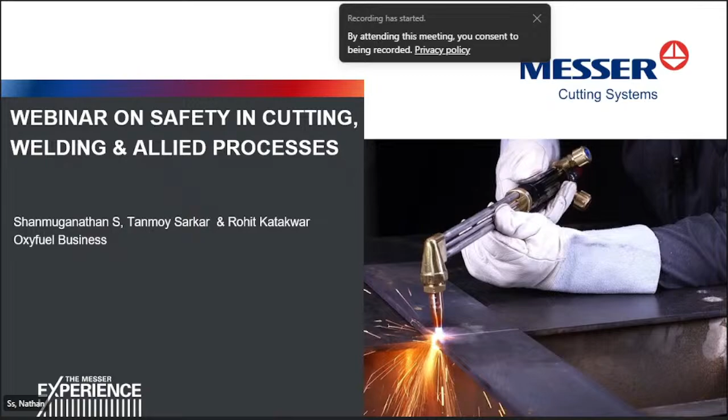So we move on to our topic. Just before that, a small introduction on our Messer Cutting Systems. Messer basically is a company more than 125 years old. It was founded in the year 1898 as Adolf Messer GmbH in Hoechst at Frankfurt in Germany. This company's business was initially acetylene-based lamps, that is lighting systems for automobiles. So what you see here is one of the first products of the company, which is an acetylene-based lamp.

So those days, automobiles did not have this kind of headlights. They used to have this kind of lamps as headlights. And later on, they made acetylene generators, gases, and so on. Slowly in 1903, the R&D team of Messer introduced the first oxyfuel cutting torch in the market. Ernst Wiss was the scientist who brought in the first oxyfuel cutting torch. It was later patented, and the present day cutting torch is a development from this basic model.

In 1965, Messer Griesheim was formed with Hoechst Pharma as the biggest shareholder. And in 1970, the first CNC cutting machine, the first laser cutting machine, was launched into the market by Messer. So there are many such firsts, as Messer is a pioneer in welding and cutting business, and they are also the largest gas manufacturing business company in the world. As far as family businesses go, Messer is the biggest gas company in the world.

We are part of the Messer group, and Messer Cutting Systems has got 5 plants worldwide. The mother plant is at Groß-Umstadt in Germany, around 85 kilometers from Frankfurt. Then we have a plant at Menomonee Falls near Chicago in USA. Then we have a plant in Sao Paulo, Brazil. We have a plant in Jiangsu province near Shanghai. And we have our Indian plant at Malumichampatti, on the outskirts of Coimbatore. So our plant is the youngest of the lot.

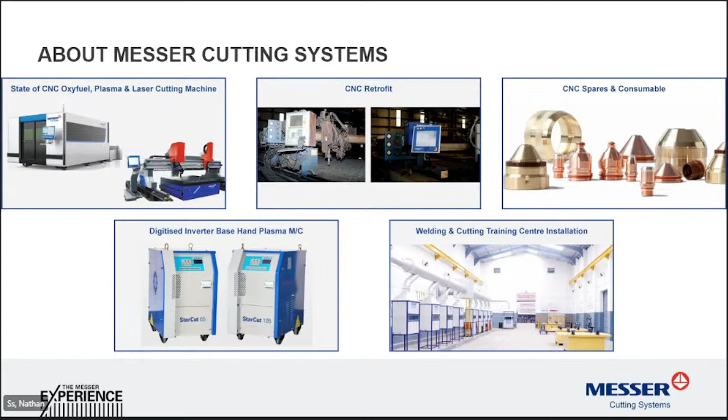We also are into the business of genuine CNC spares and consumables, to ensure the machines give good performance. We also have a range of digitized inverter-based hand plasma machines which give very good performance. And we help in setting up welding and cutting training centers across the country, along with industry and academia. We have a complete range of gas equipment, which we'll see in more detail today, a full range of engineered gas supply manifold systems for technical gases, and a complete range of welding accessories. We also conduct safety training programs and gas equipment safety assessments for companies.

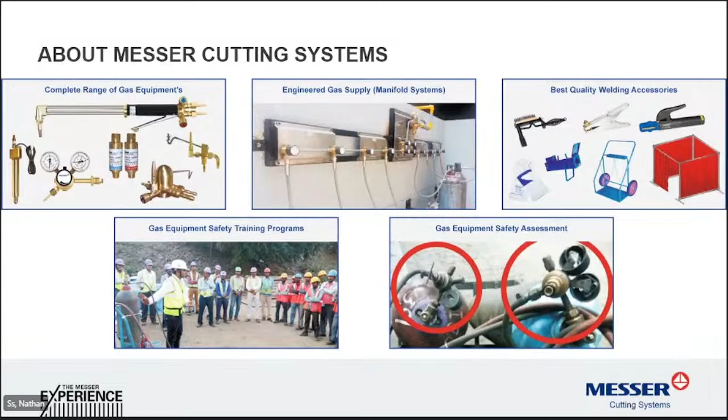So these are some of the offerings that we offer to customers. Our safety training programs are appreciated across the country, and we do close to 500 plus programs every year at various sites and factory locations. At Messer, we always try to give a positive experience to our customers consistently.

Whether it is a phone call, an email, or a visit to our factory, or a visit of our personnel to your factory, we always try to have a positive and consistent experience for the customer.

This is a glimpse of our manufacturing facility in India. We started this factory way back in 2009 at a rented facility with only a few employees. Then we moved to our own facility in 2013, and today, after expansion in 2019, the present facility looks like this.

Here we manufacture oxy-fuel, plasma, and laser cutting machines, plus gas cutting torches, regulators, and a few other products.

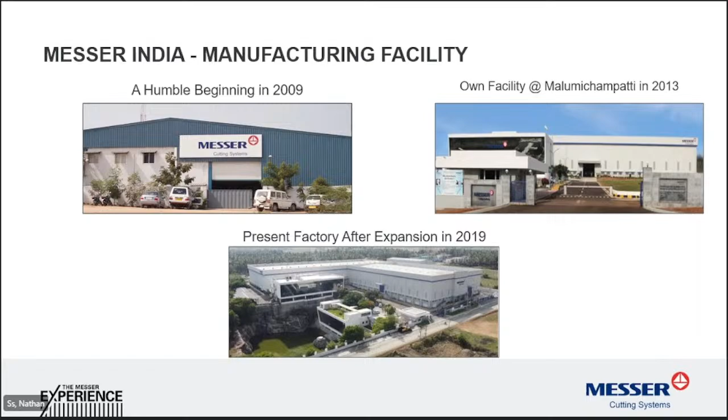This is our 300 plus strong team with a very vibrant R&D and a full-fledged sales, marketing, and service team. These are your oxy-fuel contact people across the country.

So now we move on to our topic of the day. These are a glimpse of the products that we offer to our customers.

These are oxy-fuel equipment, manifold systems, and welding accessories. You can see there is a complete range of equipment.

Just look at the regulators themselves - there is a variety of regulators available for various gases, various pressures, and various applications. Likewise, we have cylinder pressure regulators and manifold regulators, which differ in functionality and ratings.

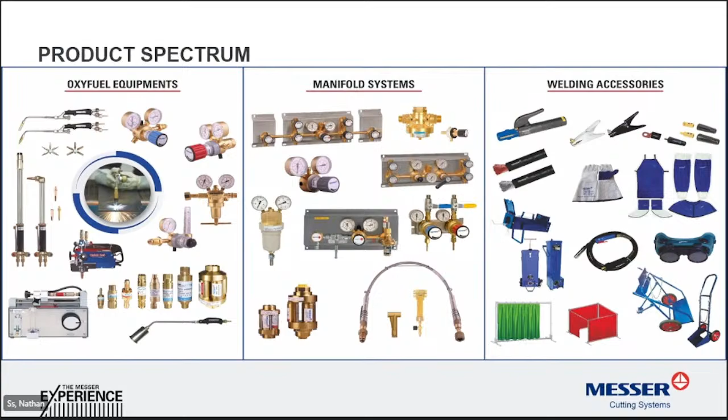Likewise, we have a complete range of welding accessories which ensure the welder's safety.

This is a glimpse of our manufacturing facility in Coimbatore. You can see our regulator assembly and testing line, and also the torch testing line.

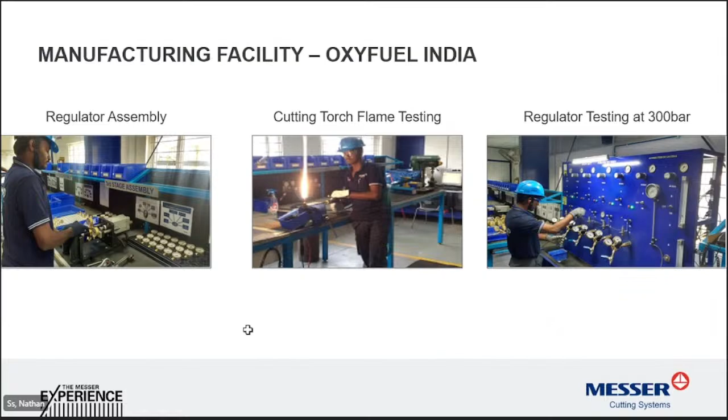For your information, all products manufactured by Messer at our factories are 100% tested before dispatch. There is nothing called batch testing - every product we make is tested 100% before we send it to our customers, so you can be rest assured about the performance and quality of the products.

Now, this is something for you to think about. Gas cutting has traditionally been regarded as a low-end technology process that anybody and everybody can do.

But if gas cutting is not taken seriously and the safety precautions are not followed properly, the outcome can be disastrous. We cannot play around with this kind of equipment.

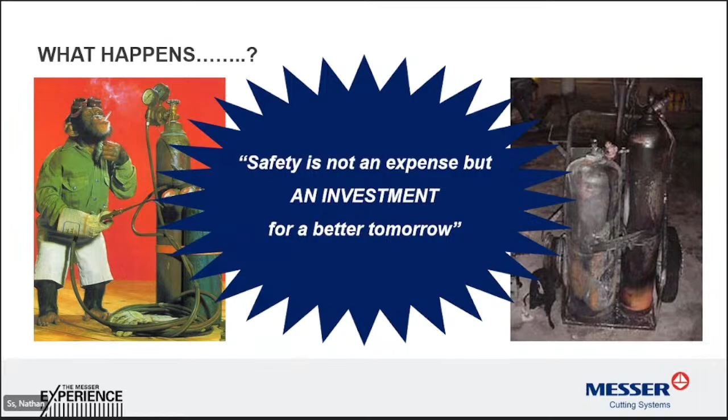Safety, gentlemen, is not an expense, but an investment for a better tomorrow. So we have to heed safety and look at what kind of equipment we are using, what safety precautions need to be taken, and how we can avoid accidents.

Now here are a few glimpses of some accidents which have happened in the industry in the past. These are all reputed companies where some sort of mishap has happened because of a slip. Here you can see a picture of a flashback that has occurred.

What you see is an acetylene regulator. You can see that the entire regulator is completely burnt, with a lot of carbon deposit inside. The flame has traveled through the hose.

After bursting the hose, the flame traveled to the flashback arrestor device - you can see a brass device here that looks like the flashback arrestor - and then it passed that also, went inside the regulator, and burnt the regulator.

Fortunately for the user, it went into the inlet connector of the regulator and blasted there. After blasting, it fell almost 100 meters away and flew almost 40 meters in height. Imagine a regulator with a flashback arrestor flying almost 40 meters high and then falling 100 meters away.

This could easily have injured people - it could have caused grievous injuries. But fortunately for us, nothing much happened. The operator was safe; only the torch in his hand had a small blast, and he had a small cut in his hand.

Otherwise, he was safe, so nothing much happened. But the incident shook the site and the work was stopped for a week's time. Now, what is wrong here?

What you see is a normal regulator. They say it's an ISI regulator, but it is a normal regulator. There is a flashback arrestor safety device fitted here for the safety officer. In actuality, this device is not a proper flashback arrestor because it does not meet any international or national standards on safety. This is just a brass cylindrical lookalike of a flashback arrestor. Inside it, there is nothing which can prevent a flash or flame from going back into the tube or the torch itself.

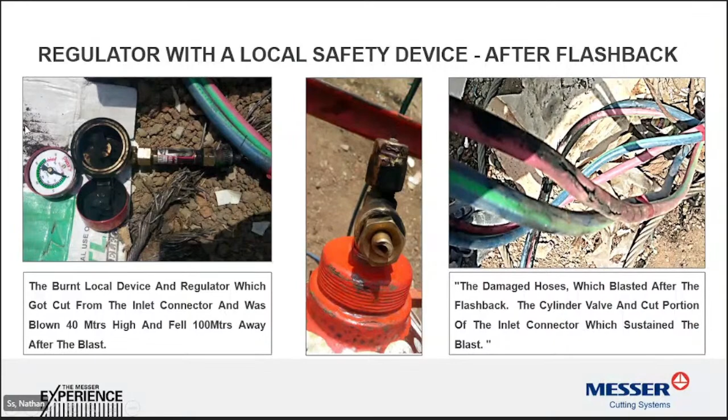So people have bought a lookalike of a flashback arrestor just to satisfy the requirements of the safety officer, and they've gone ahead and fitted it and started using it. When the accident actually happened, this device never gave any kind of support to the operator or the customer.

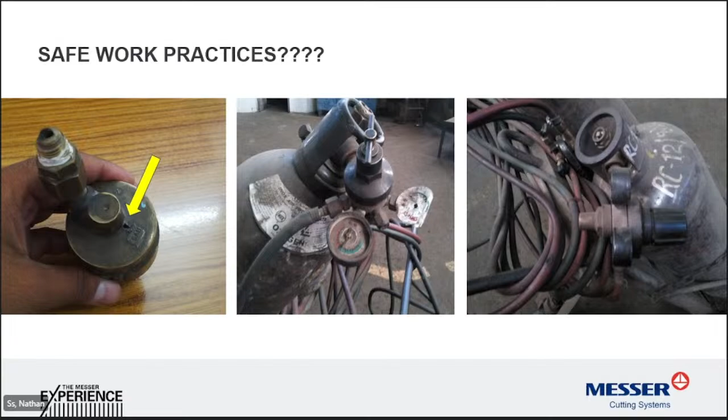So this is called adiabatic compression or a gas hammer effect. To avoid this, we must always ensure that cylinders are opened gradually and very slowly, and we should not allow the operator to open more than half of the cylinder valve. That way we will ensure that only the required amount of gas flows into the system.

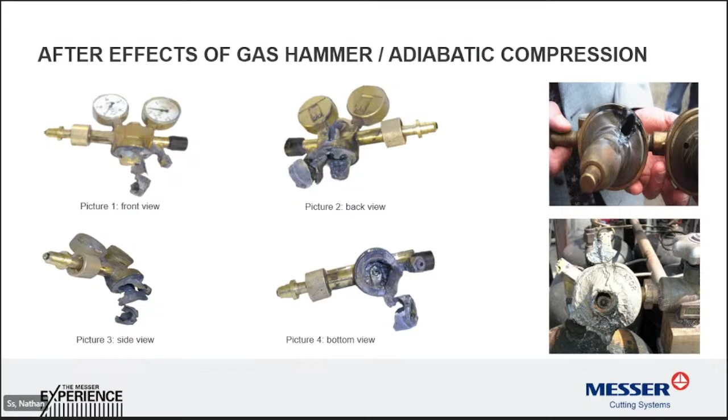So whatever kind of gas cutting equipment we use, flashback arresters need to be there to ensure the safety of the plant, and certain safe practices need to be followed.

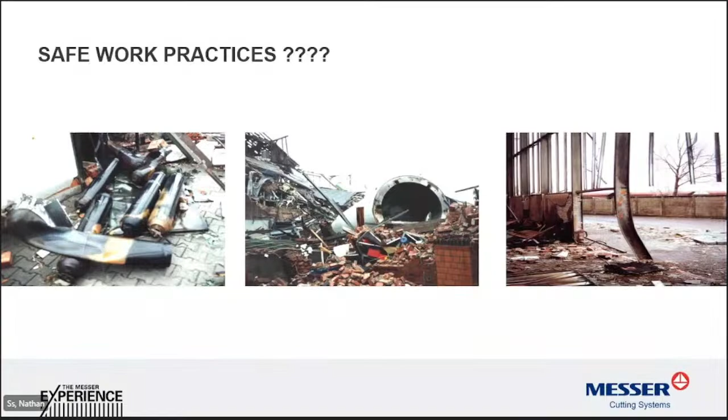On the left, what you see are not plastic PET bottles, but gas cylinders which have melted. There are many other news clippings like this one from the Indian Institute of Science, Bangalore, and this one from a reputed shipyard, and so on.

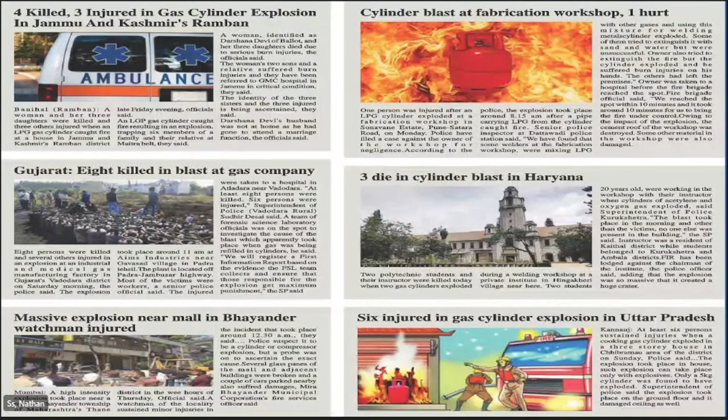These are from various other locations in the country where gas cylinder handling, mishandling of cylinders, and not sharing the right kind of data have led to many such accidents, and a lot of fatalities have happened in the past. This should not happen to us, because if it does, it will be too late to correct anything. So it's better to take precautionary steps now to ensure this kind of accident doesn't happen to us, our factory, or our people.

So what we will try to do is have a small introduction on the gases we use, the equipment, how to select the equipment, how to use it properly, and what other kinds of safety devices are in the market.

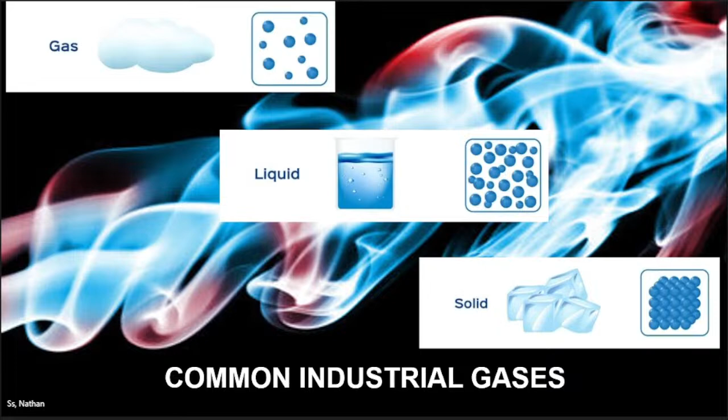So now we start with the gases. Gases come in various forms to your factory, maybe in compressed form like oxygen, or in liquefied form like oxygen, nitrogen, or LPG. It can be in dissolved form or in cryogenic form. Cryogenic liquids you get like liquid oxygen and liquid nitrogen, which come in small cryogenic tanks. Dissolved gas is mostly acetylene, which comes as dissolved gas, called dissolved acetylene, dissolved in acetone.

At other plants, what you get is gaseous or compressed gas. So we have a cylinder at say 200 or 230 bar pressure, whereas we need the gas at only 5-6 bar pressure. So at these places, the gas is filled inside the tank at high pressures and taken to various locations and given to the customer directly for use. This is how gases are moved around in the industry.

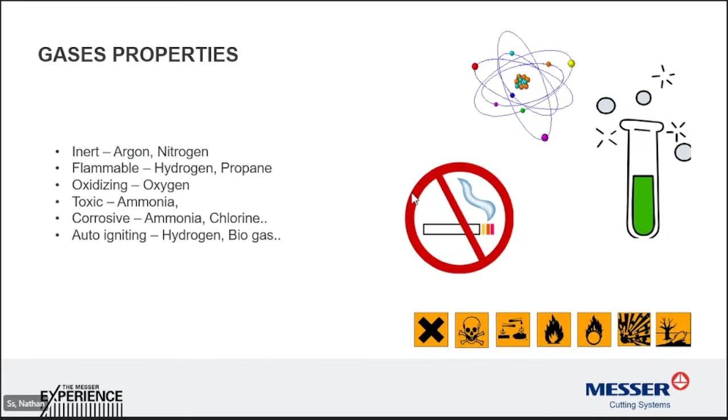Oxygen gas has the chemical formula O2. It's a colorless gas with no smell. Without oxygen there is no life, and no combustion either. This is not a hydrocarbon gas; it is available freely in the atmosphere. If you look at atmospheric air, almost 23% of it is oxygen, and the rest is nitrogen and other gases. This is stored in compressed form in cylinders, maybe at 180 or 200 bar.

This brass valve at the top is the weakest portion of the cylinder. If it is not protected properly, the valve can cause damage and the cylinder can fly like a rocket.

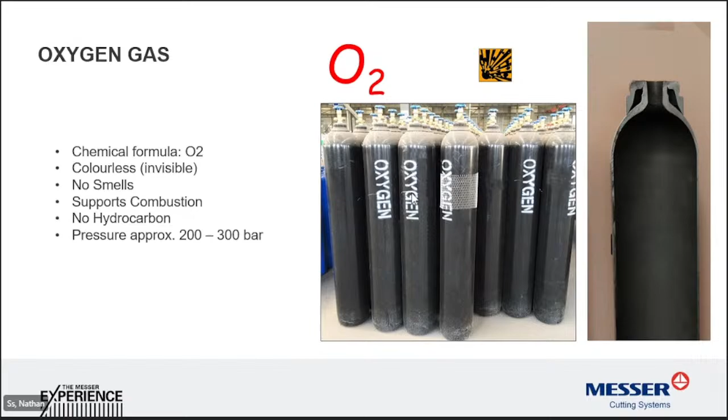Acetylene, on the other hand, is a very risky gas. Undissolved acetylene gas at 30 pounds, that is 2 bar pressure or more, can explode from shock alone. That is why we have to dissolve acetylene when storing it in cylinders and transporting it around. For dissolving acetylene, we use a chemical called acetone, which dissolves almost 25 times its volume of acetylene inside the cylinder, where we have an internal lining of calcium silicate, charcoal, glass wool, asbestos, and other materials that help absorb the acetone and the acetylene gas with it.

Once the time comes for using it, we have to open the valve of the cylinder, and acetylene is released from the acetone at the rate of 1 cubic meter per hour.

The maximum amount of gas you can draw from an acetylene cylinder is only 1 cubic meter per hour at peak, and maybe 0.5 to 0.6 cubic meter per hour continuously if you are using it continuously. You also have to be aware that acetylene is the most flammable gas in the range.

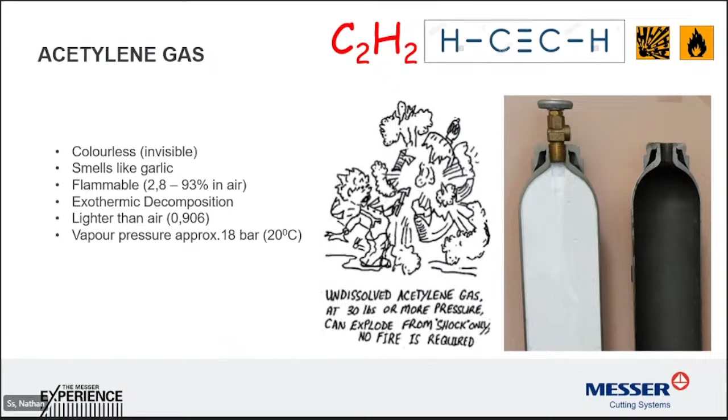The flammability level of acetylene is between 2.8% to 93% in air. So whether it is 2.8% or 93% acetylene, it is definitely flammable and can cause an accident. So we have to be extremely careful when we use this gas. Also, conditions like higher heat or higher pressure can cause decomposition of acetylene as it is unstable, which can lead to very big repercussions.

So when we use acetylene, we have to take adequate safety precautions. We have to use the gas at less than 1.5 bar pressure. We have to use the right kind of flashback arresters and the right kind of equipment, and take care properly.

Now LPG is something we all know about. When we were kids, we used to talk about 'tumhare ghar mein gas hai, mere ghar mein gas hai' and all sorts of things, because gas used to be so precious. Everybody did not have access to it, and that is why LPG was very scarcely used in industries. So LPG is a mixture of propane and butane.

The chemical formula of propane is C3H8. Again, this is a colorless gas with no smell, but just in order to identify a leakage, suppliers have added a chemical called mercaptan to the gas so that it gives a distinct odor. So whenever there is a leakage of LPG, you get this special smell which indicates that gas has leaked, and you have to take adequate precautions.

This is also flammable, but only between 2% to 10%. So if you have more than 2% but less than 10% of LPG in the room, the mixture is highly flammable. But if you have more than 10% of LPG in air, then it is not very flammable. This is something you have to understand.

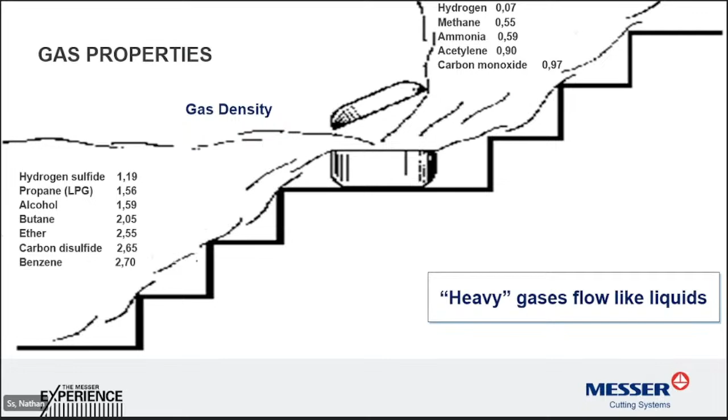So gases like butane, propane, alcohol, ether, etc. flow like liquids, while light gases like hydrogen, acetylene, etc. will fly away. That is why whenever we have an LPG leakage, we talk about opening the doors and windows, shutting down the gas, mopping the area, and clearing it completely so that the gas and the places which have absorbed the gas are cleared completely.

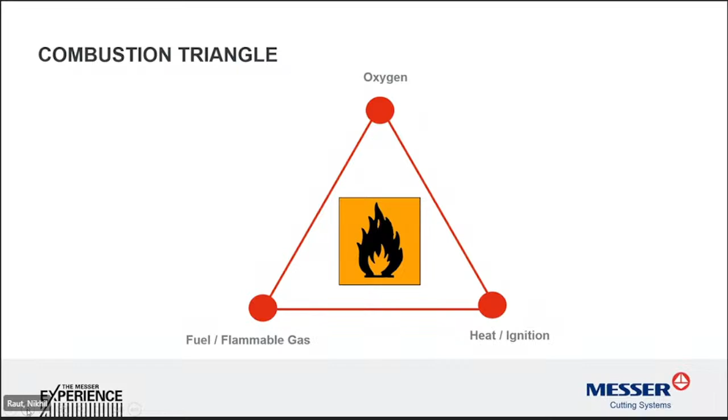These are some different types of oxy-fuel processes. In the extreme top left corner, this is manual gas cutting through a 3-pipe cutting torch. Then in the middle, this is oxy-fuel heating, and in the extreme top right corner, this is gouging. At the bottom, you can see brazing, and on the right side, flame cleaning.

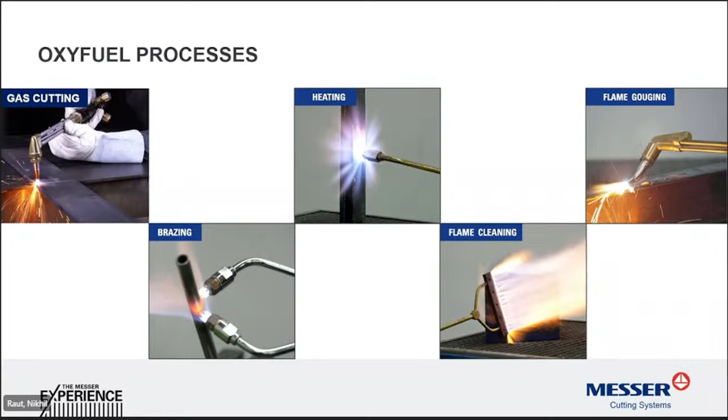Various types of fuel gases are available globally, but in India we generally use acetylene, hydrogen, LPG, propane, and natural gas as fuel gas.

Application-wise, for oxyfuel welding, only acetylene can be used. For brazing, soldering, and flame heating, all these fuel gases can be used. For flame cutting, only LPG, propane, and natural gas can be used. For cutting thickness of 300 or above, we can use only propane and natural gas. And for scarfing also, we can use propane and natural gas.

Now we will discuss oxyfuel cutting and gouging applications. On the left side, you can see manual gas cutting done through a hand cutting torch. In the middle is our Potacut portable gas cutting machine. You can use this machine for straight or multi-bevel cuts with two torches, and cut up to 300 thickness through this machine. On the right side, this is a gouging application. You can do gouging through the gouging nozzle fitted in our oxyfuel torch.

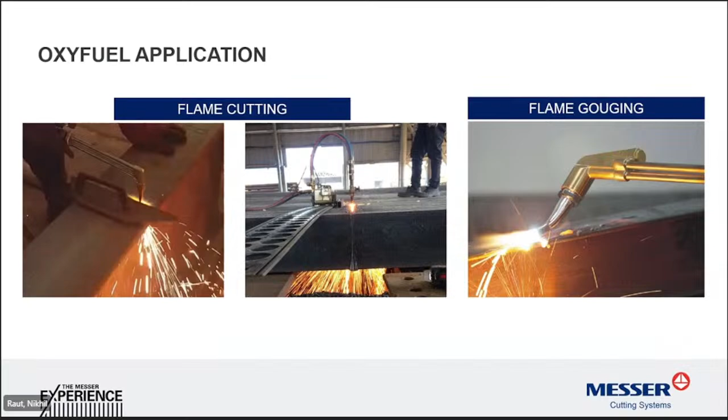Here you can see the Messer make CNC cutting machine with oxyfuel torches. There are 3 flashback arresters fitted on the backside of each torch: one for heating oxygen, one for cutting oxygen, and one for fuel. If backfire happens through the torch, these flashback arresters will stop the backfire and keep the machine safe from damage. So we recommend using flashback arresters on the backside of CNC cutting machine torches to keep your machine safe.

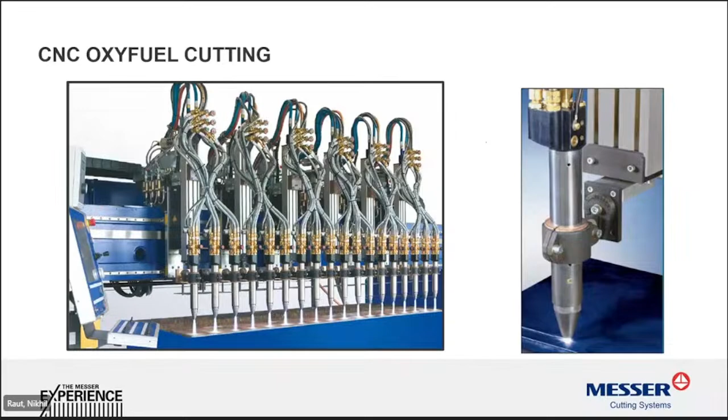Oxyfuel cutting is basically an oxidation process. A chemical reaction happens in this process, called an exothermic reaction. First, the material gets heated through the heating flame with heating oxygen and fuel mixture. Then, after pressing the lever of the cutting torch, the oxidation process starts. Due to the high flow of cutting oxygen, slag material also gets removed. In this way, the oxyfuel cutting process happens. Please note, for oxyfuel cutting, the melting temperature of the oxide form of the material should be less than the base material melting temperature.

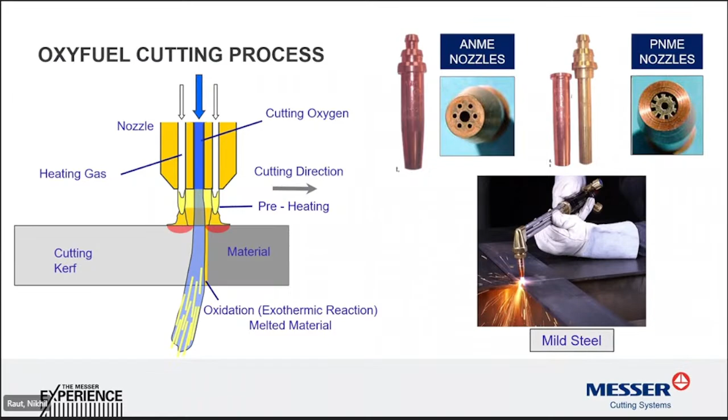Now we will discuss the flame temperature for different fuel gases. For oxyacetylene, maximum flame temperature is 3160 degrees Celsius. For hydrogen, it is 2856 degrees Celsius, for propane it is 2828 degrees Celsius, and for natural gas it is 2786 degrees Celsius. Generally in India, mostly we use oxy-LPG or oxyacetylene flame for any oxyfuel application. So you can see acetylene flame temperature is much higher compared to other fuel gases.

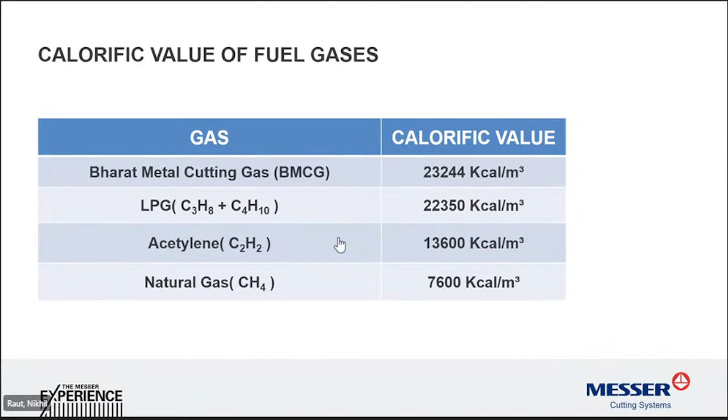For creating the flame in the oxyfuel cutting process, you must use fuel gases. Here I will discuss the calorific value of fuel gases. For Bharat Metal Cutting Gas (BMCG), calorific value is 23,244 kilocalorie per meter cube. For LPG, it is 22,350 kilocalorie per meter cube. For acetylene, it is 13,600 kilocalorie per meter cube. For natural gas, it is 7,600 kilocalorie per meter cube. LPG calorific value is naturally much higher than acetylene and natural gas.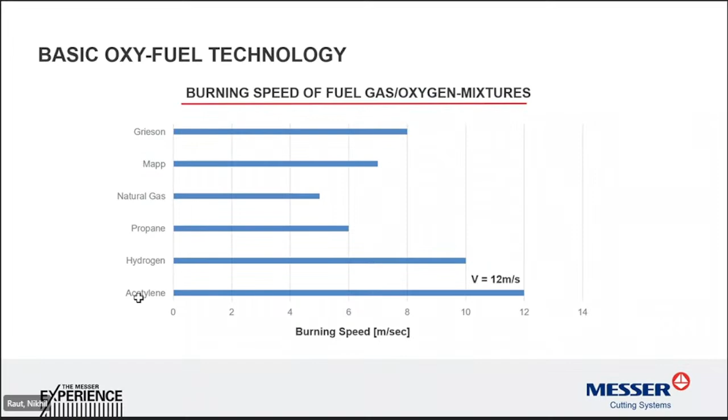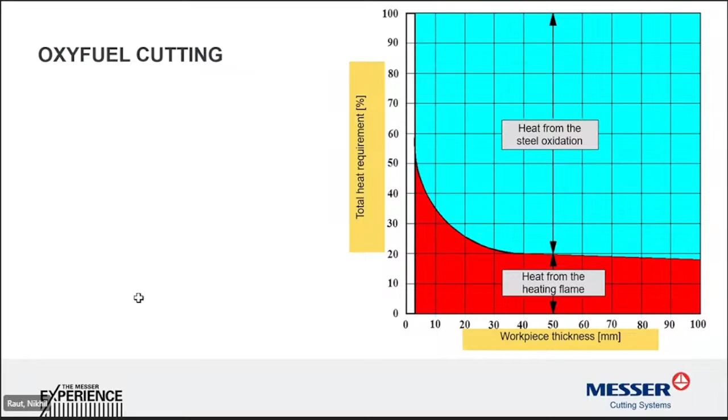In this graph, you can see that during oxyfuel cutting, initially the material gets heated through the heating oxygen flame, and then as it moves forward, heat generation gradually increases through the oxidation process. I will explain the percentages in the next slide.

In this chart, you can see that during the oxyfuel cutting process, initially 50% heat generates from the heating flame through heating oxygen and fuel mixture, and 50% heat generates from the oxidation process through cutting oxygen, which also helps remove the slag material. When the oxyfuel process moves forward, heat generation gradually increases through the oxidation process, and then 75% heat generates from this oxidation process while 25% heat generates from the heating flame through heating oxygen and fuel mixture.

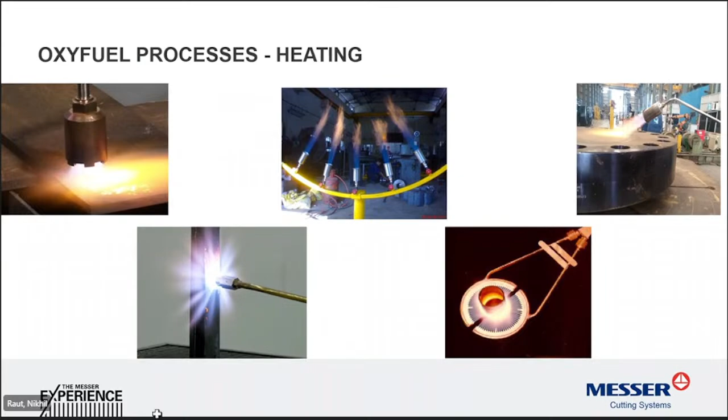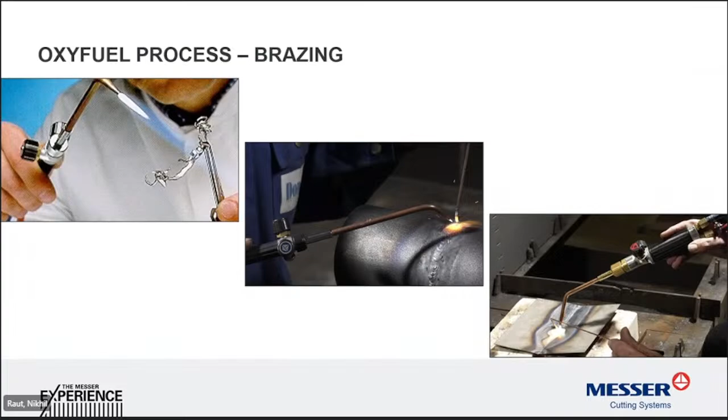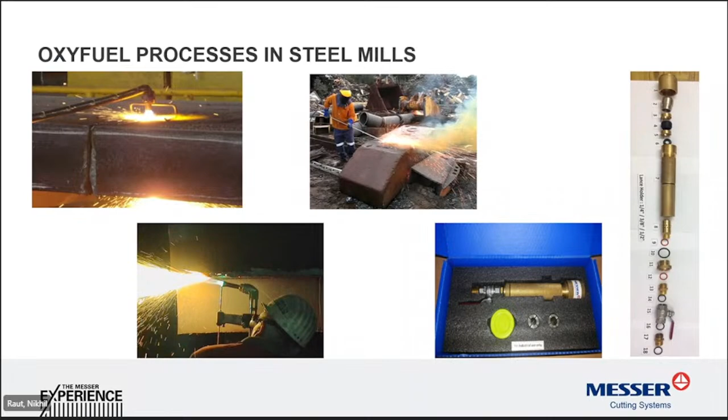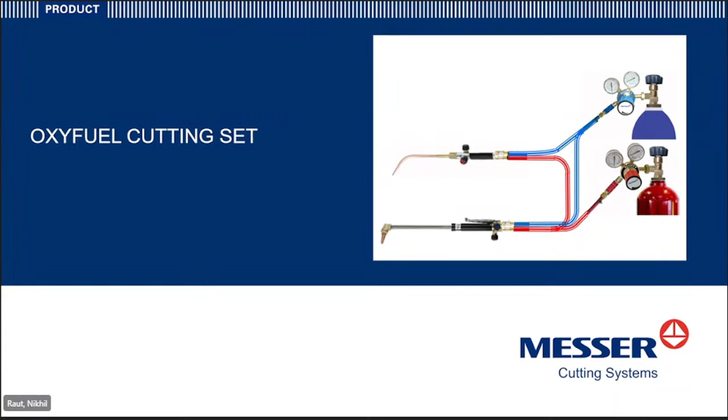Now we will discuss backfire and flashback. What is backfire? Backfire is the penetration of the flame into the nozzle or into the torch's mixing tube, with an explosive noise where the flame is extinguished. If the process continues, then a chattering noise is to be heard.

For flashback, a flashback is the penetration of the flame into the torch where it continues to burn in or around the mixing area.

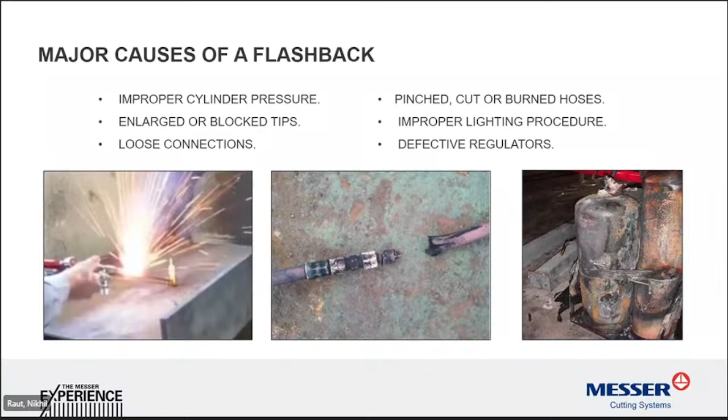Fourth, pinched, cut, or burned hoses, because there might be a chance of leakage in these cut portions of the hoses, which can cause fire and major accidents at site. Fifth, improper lighting procedure, and sixth, defective regulator.

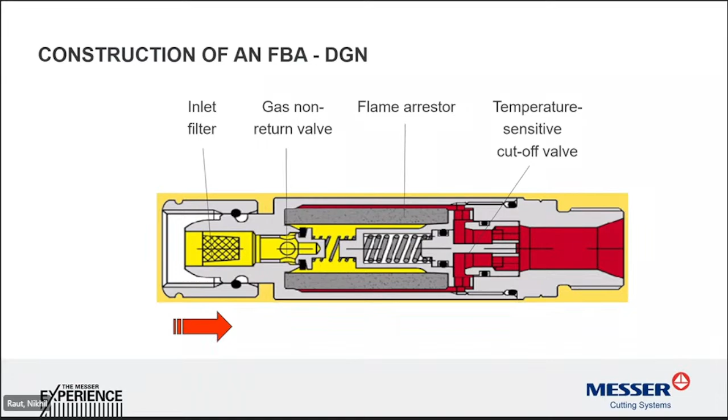Now we will discuss the construction of a flashback arrestor. There are four parts of a flashback arrestor: first, inlet filter; second, gas non-return valve; third, flame arrestor; and fourth, temperature sensitive cutoff valve. In the next slide, I will elaborate on how this flashback arrestor actually works.

First, inlet filter — it helps remove impurities from the gas. Second, gas non-return valve — it helps stop the gas flow during the time of flashback or backfire. Third, flame arrestor — it helps absorb the flame during the time of flashback and backfire. And fourth, temperature sensitive cutoff valve.

This has been fixed with a certain ignition temperature. During the time of flashback, the flashback arrestor body temperature — if it reaches 95 degrees Celsius or more, the valve will automatically activate and it will completely stop the gas flow.

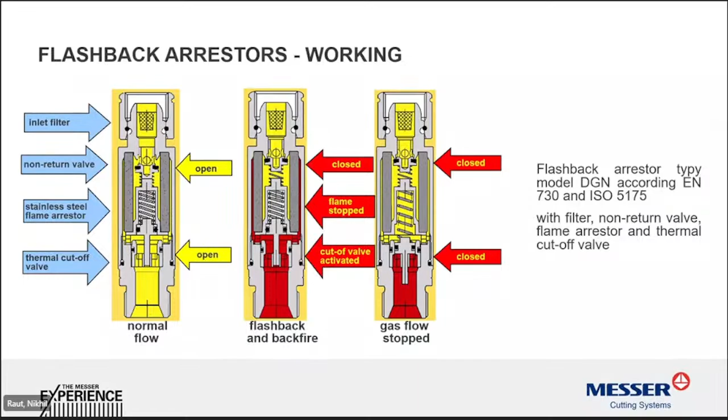We recommend using flashback arrestors on both sides, for the torch side and cylinder side. Even for acetylene gas, we recommend using one in the middle also. We have a complete range of flashback arrestors, and depending upon the flow and the application, we generally prescribe the appropriate flashback arrestor. We have pipeline flashback arrestors, as well as a flashback arrestor for pug cutting machines.

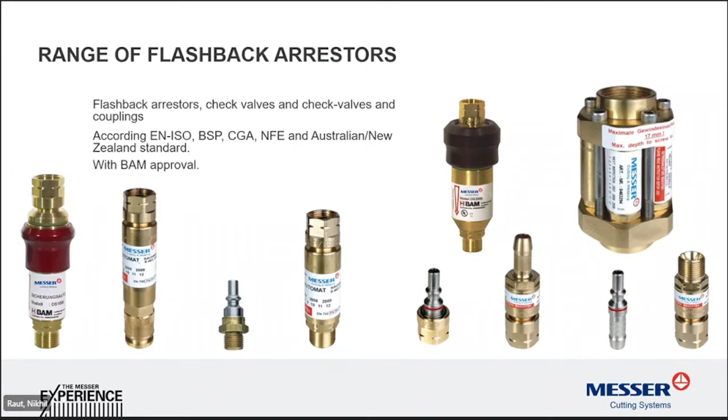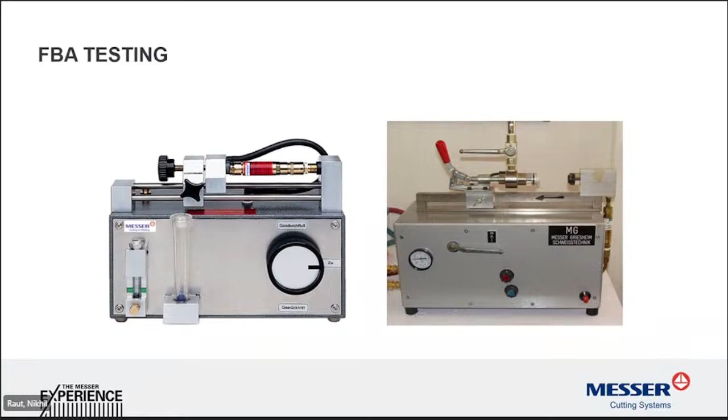Gas regulator. We have a complete range of gas regulators, from cylinder pressure regulators to high pressure manifold gas regulators. Our regulator body is a solid forged brass body, robust in quality. All gas regulators are manufactured as per international standard 2503. For every regulator, there is a filter installed in the inlet portion which can remove impurities from the gas.

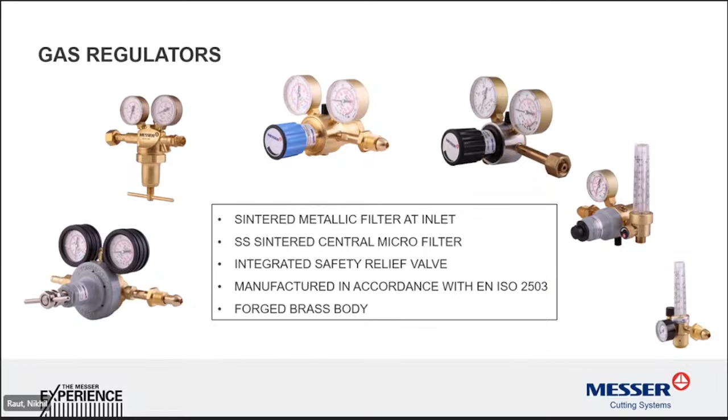Now we will discuss single stage and double stage regulators. In a double stage regulator, there is a preset pressure outlet for the first stage, and the first stage is piston type control while the second stage is diaphragm type control. For a single stage regulator, it reduces the pressure in a single stage naturally. So we always recommend using a double stage regulator to get precise flow and pressure.

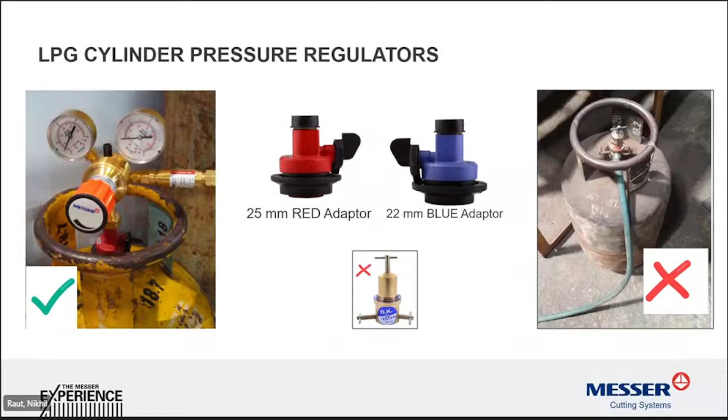In the middle, you can see two types of adapters. On the left side is the 25 red adapter, which can be used for government LPG cylinders, and on the right side is the 22 blue adapter, which can be used for private cylinders.

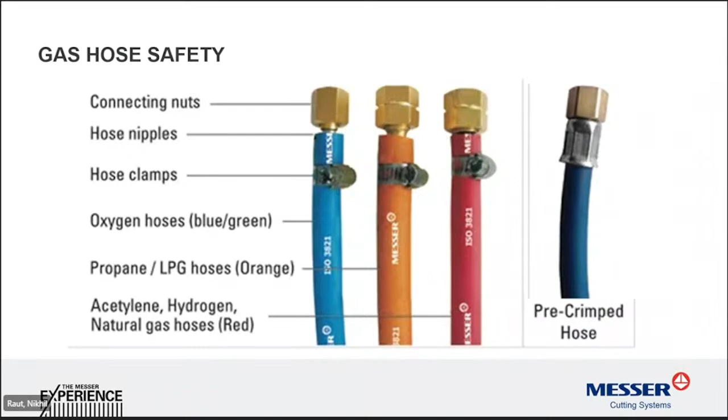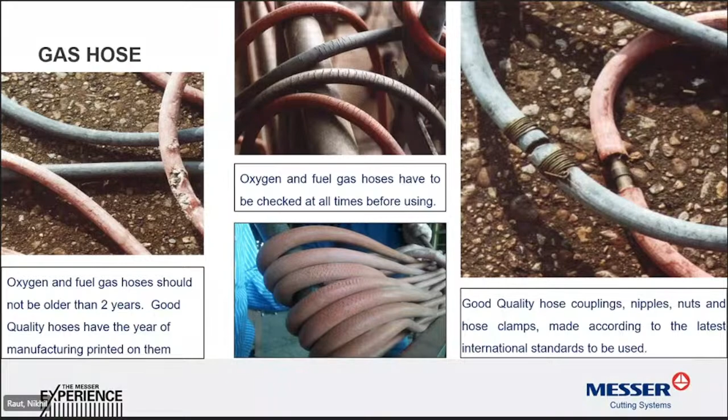Please note, a standard gas hose has a life of 2 years. We should not use any gas hose older than 2 years. Even good quality hoses have the year of manufacturing printed on them, including our gas hose. Good quality gas hose couplings, nipples, nuts, and hose clamps made according to the latest international standard should be used at site.

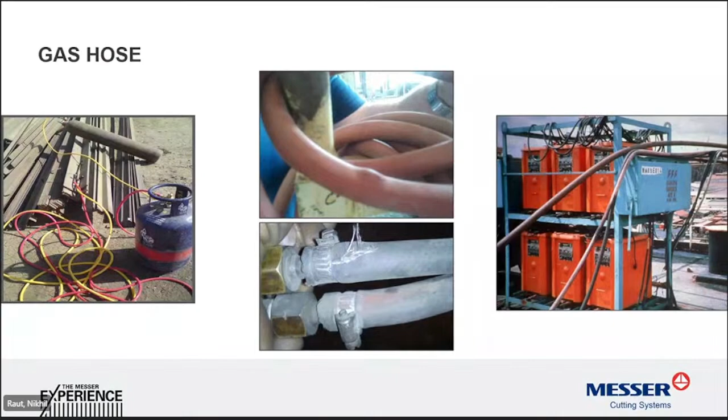This kind of hose can be seen at different sites, which can cause a major accident. On the left side, you can see a yellow color gas hose being used for the oxygen cylinder, and a pink color hose being used for the LPG cylinder, which we always suggest not to use. We always recommend using proper gas hoses like blue or green for oxygen and orange for LPG. On the right side, you can see the gas hose placed on the electric panel. If there is any leakage, there is a chance of electric shock, which can also cause a major blast. So we should ask you to avoid this kind of thing at site.

There are basically three layers or parts of a gas hose. The upper portion is the cover, one of the most important parts because it protects the gas hose from environmental damage such as oils, acids, sunlight, and ozone. The middle layer can be textile, plastic, or metal, or a combination built into the body of the hose to withstand internal pressure, external force, or a combination of both. The inner tube, the innermost part of the hose, is one of the most important parts because the thickness of the tube is based on the service for which the hose is designed.

Generally, we can see this kind of clamps used for hoses at different sites, but we always recommend using right-sided pre-crimped hoses. If you use this kind of jubilee clamp, it can damage the joining area of the hose, as you can see in the middle. After some time of use, it generally affects the hose, and there might be a chance of gas leakage at that portion. So we always recommend using pre-crimped hoses at site.

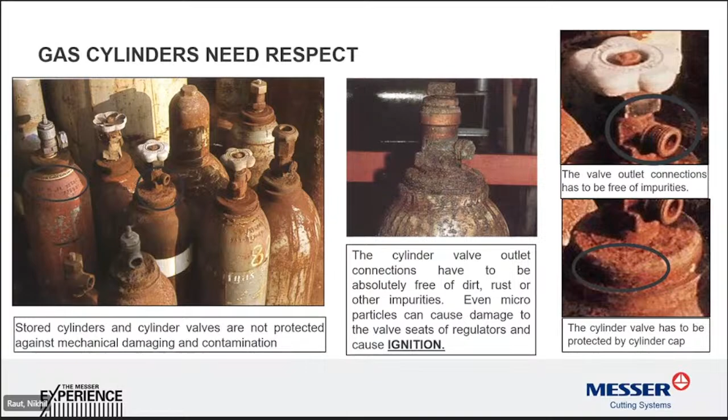This kind of mishandling we can also see at different sites. We should not allow this kind of mishandling. We should always ask our workers to handle the cylinders properly, and we always suggest keeping the cylinders in a standing position.

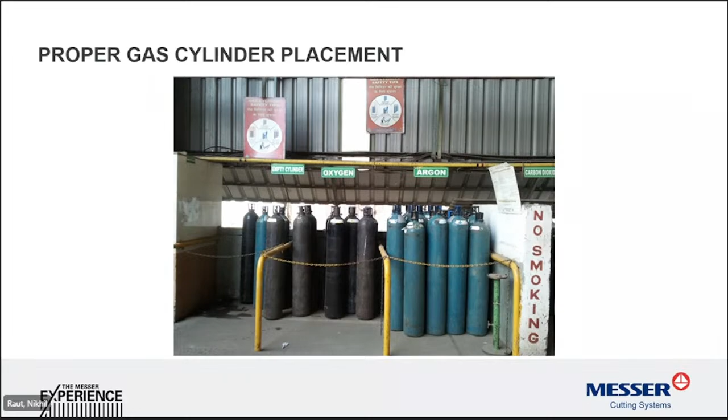Now let us discuss the gas manifold system. What is a gas manifold system? We have all heard about this gas manifold system. A gas manifold system is nothing but a series of cylinders connected with each other, and the high pressure gas coming out from the cylinder goes to the pressure reducing station where the high pressure is converted to low pressure, and the low pressure gas is then carried forward through pipe to various points of usage. So this is basically a gas manifold.

Now, what are the advantages of a gas manifold? There are various advantages of a gas manifold. It reduces the risk of accidents since all the cylinders are placed outside the factory premises, so there is no possibility or chance of accidents at the workplace. Since gas supply is continuous, there is also savings of gas.

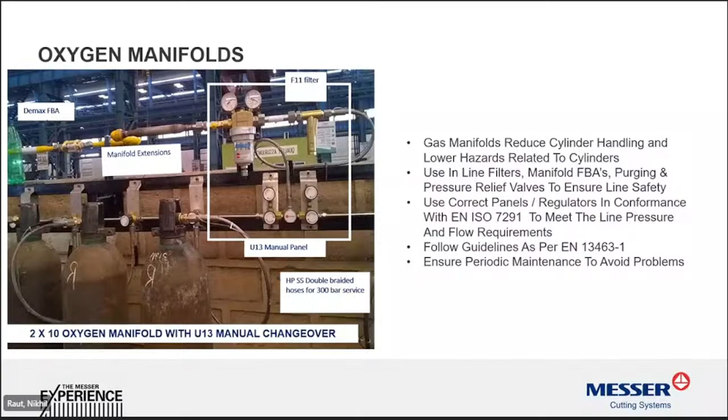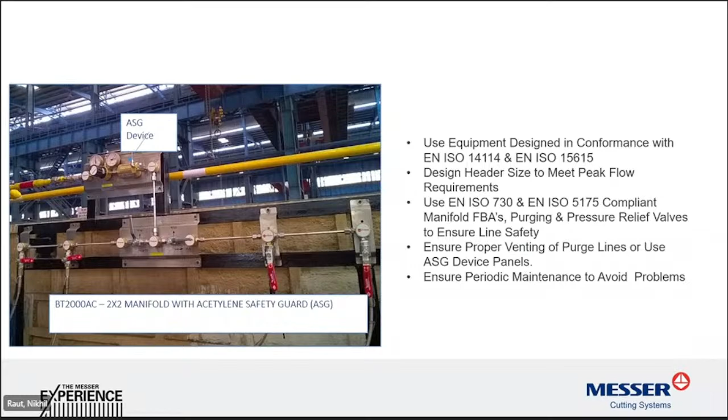The decomposition of the acetylene gas is in the form of an exothermic reaction, and high heat is released. So in order to keep the gas pressure within the prescribed limit, we use the acetylene safety guard. In the next slide, you can see the placement of the acetylene safety guard, placed before the pressure regulator. This acetylene safety guard works on a feedback mechanism basically. It takes the inlet and outlet pressure, and if the pressure exceeds beyond a certain set level, it cuts off the gas supply into the system, making the system completely safe.

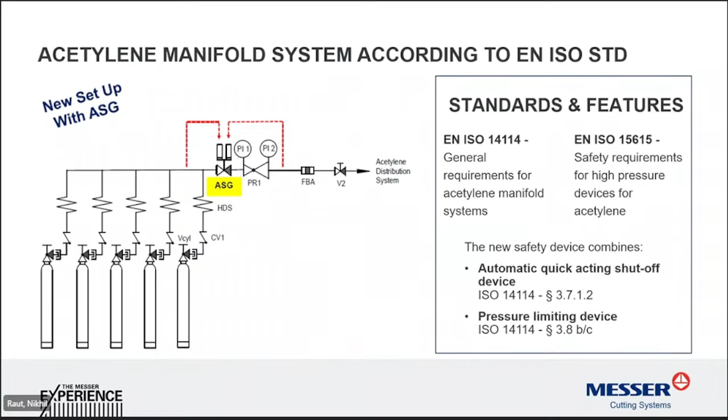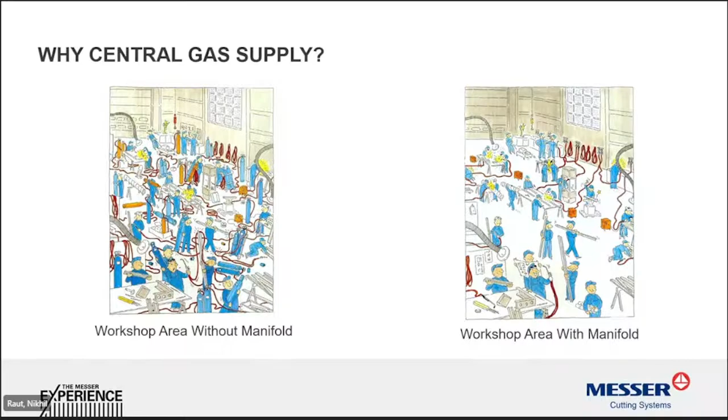Now this is how a workshop looks after we install a gas manifold system. In case you're going for a gas manifold system, you can see the workshop area is completely clutter free and completely safe.

Now till now we have discussed safety aspects related to gas cutting. Now let us discuss the safety aspects related to welding activities.

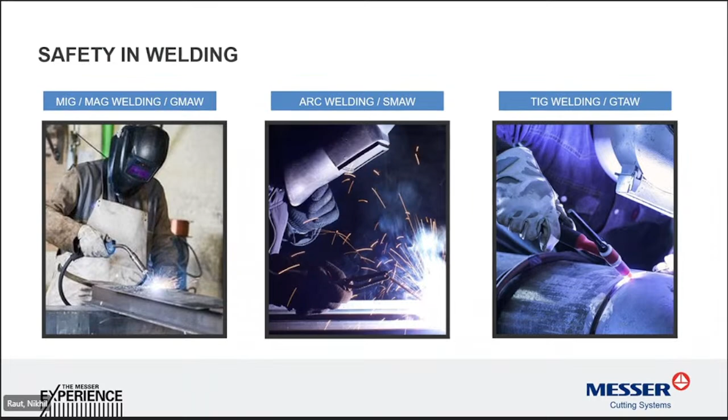Now these are three most common welding processes carried out in industry: MIG welding, arc welding, and TIG welding. And whenever we carry out such welding activities, there are various hazards associated with them.

Now, the most common hazard is the electrical hazard, and it has been the pain area for the safety officer. These electrical hazards come in the form of electric shocks. Now, how to prevent these electric shocks?

If a welder doing the welding is using a fully insulated welding electrode holder, there are no chances of him getting an electric shock, because the welding holder is completely insulated, and the welder cannot touch any metallic part of the welding holder.

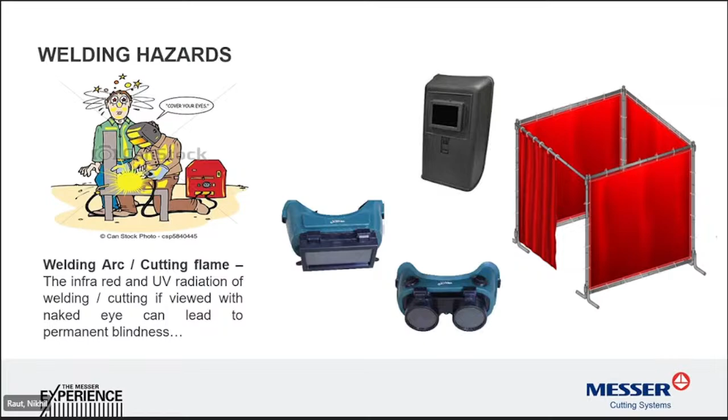Now, all of us might have got arc eye at some point of time. This arc eye is basically a result of the ultraviolet radiations coming out when a person is doing welding. So please ensure that whenever a person is doing welding, he is equipped with all safety gears such as screens and welding curtains, because if his eyes get exposed to the ultraviolet or infrared radiations, it can lead to permanent blindness.

Now, heat and spatter are also one of the hazards when we do welding. The spatters coming out can directly pierce through the cloth and cause burn injuries to the welder. So it is always advisable to use personal protection equipment such as gloves, arm guards, sleeves, helmets, etc. The important point here is that whenever you are procuring these arm guards or sleeves, the thickness of the cloth should be more than 0.5 mm.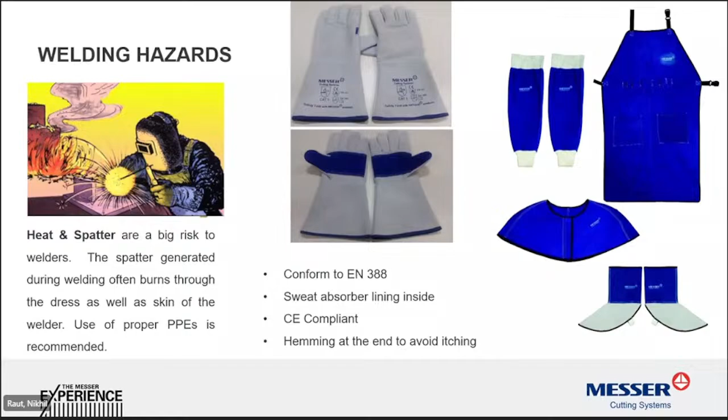Because if it's less than 0.5 mm, the spatter will pierce through the cloth and cause burn injuries to the worker. So it is always advisable to go for PPEs conforming to EN 388 standards so that the thickness of the cloth is maintained.

Now, another welding hazard is welding fumes. These welding fumes can contain many particles and cause serious health problems to the workers. So it is always advisable to use fume extraction systems so that the fumes can be easily extracted from the workplace of the welder.

Now, at times, you are using oxy-fuel products, so they require repairs also. Whenever you are going for repairs, please ensure that you are using an authorized workshop for repairs of oxy-fuel equipment such as welding regulators and cutting torches, because these are all high-pressure equipments. If they are not repaired properly, or if there are any leakages, then it can cause an accident.

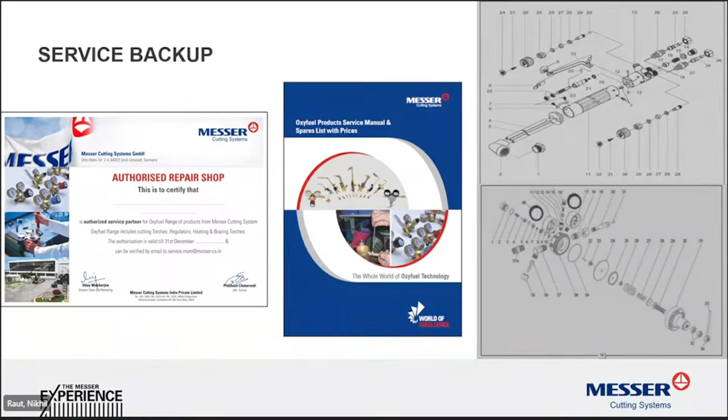Now, if you're going for a quality product, then definitely you will get savings, and these savings can lead to reduction in manpower, enhanced productivity, less consumption of electricity, and time savings. If you're going for a good quality of cutting equipment, then naturally there will be less kerf losses and it will give you metal savings.

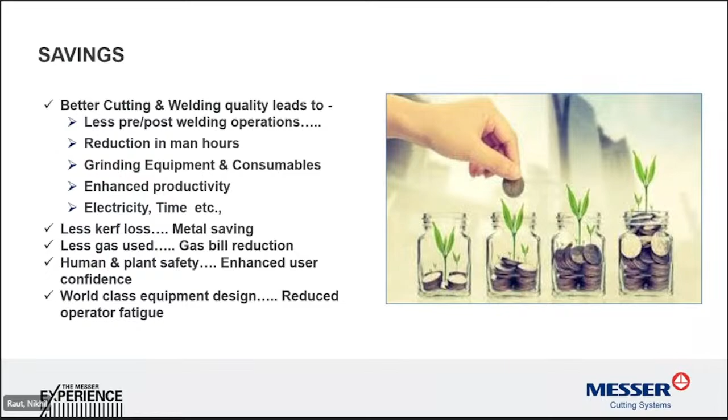So what does the Oxyfuel division offer? We have a complete range of Oxyfuel products with us, like pressure regulators, cutting torches, and we do safety training at the customer place. You can call us anytime to your premises and we can conduct a safety program. We also do safety assessment at the customer place. It's basically a short tour of the plant where we inspect every Oxyfuel working point, and if we find anything short or any unsafe practices being followed, we make a report and submit it to you. We can also give you safety posters if you require.

Oxyfuel is a vast subject, but time is the constraint. But you can definitely connect with us on social platforms like LinkedIn, YouTube, and Facebook, where you will find the latest videos related to welding and cutting activities.

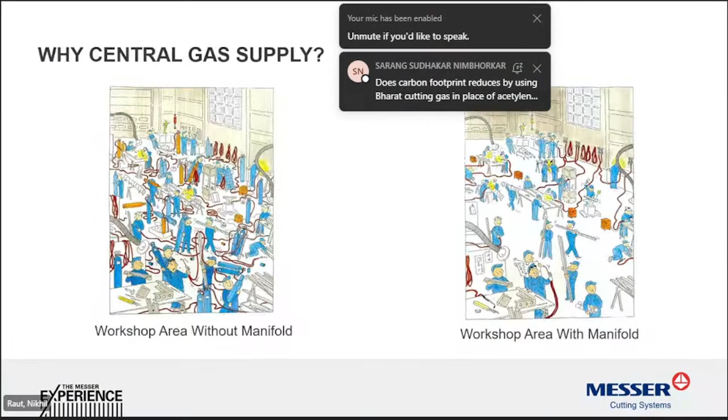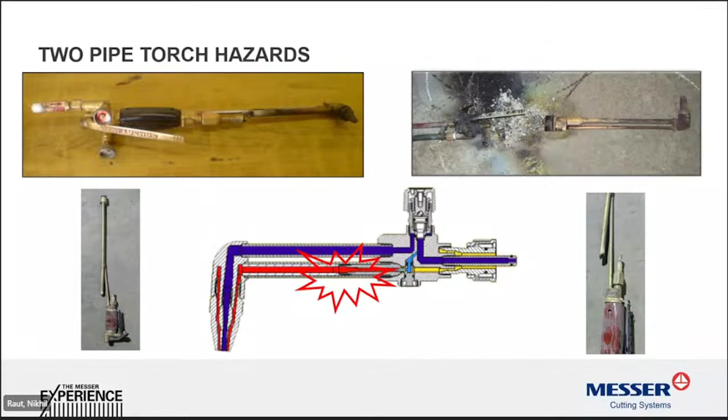Hello, sir. Nikhil, next slide, please. Hello. So, Hello, sir. yes. Sir, please tell me welding hazard. So you can first complete this concept. After that, you can tell sir others points. Okay. Tanmoy, just go carry on, complete this here.

Hello. Hello, sir. Yeah, please speak on. Hello, sir. Sir, please tell me welding hazard. Sorry, I cannot heard you properly.

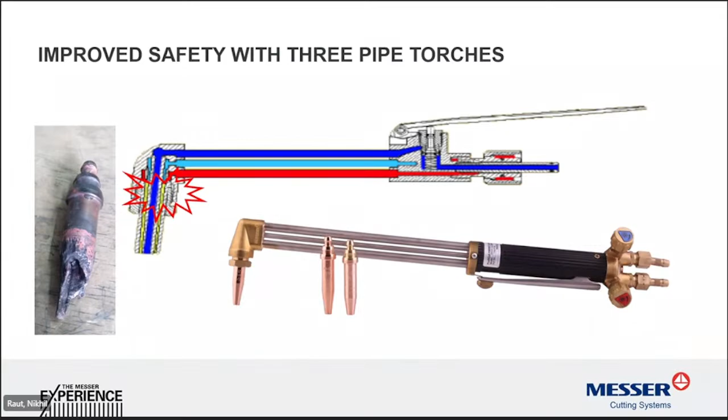Sir, I think he is actually asking about welding hazards. Information regarding welding hazards. Yes, sir. Rohit? Rohit, you're there? Yeah, tell me, yes he wants to know about welding hazards. Just give him some brief intro. Okay, tell me sir. Is he asking some specific questions, or do you want me to brief about welding hazards? I think he's asking for welding hazards to be just repeated for him. Okay, I couldn't actually hear if there are any specific questions.

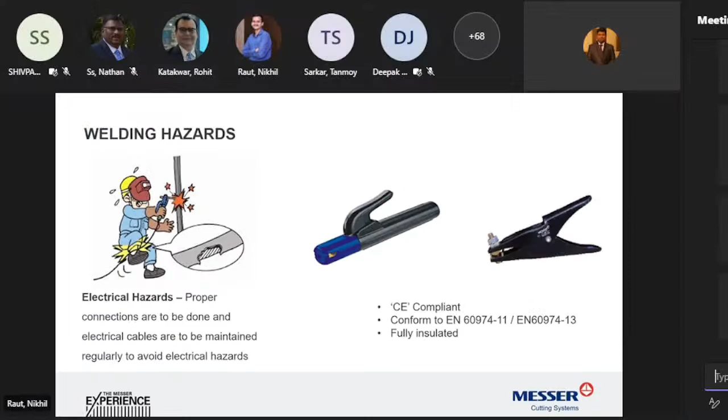There are various types of welding hazards which are associated. Now, the most common is the electrical one. Why electrical? Because we get electric shock if proper care has not been taken. So it is always a pain area for the safety officer. Whenever a person is doing welding, please ensure that he is using a proper welding electrode holder, earth clamps, and other accessories which are used for welding. Now, the other hazard which is

important, care should be taken, is of heat and spatter. Can you go to the next slide? There are other hazards, like heat and spatter. In case the spatters which are coming out of the welding process get inside or get pierced through the cloth, then it can cause burn injuries to the worker. So that is also one of the hazards.

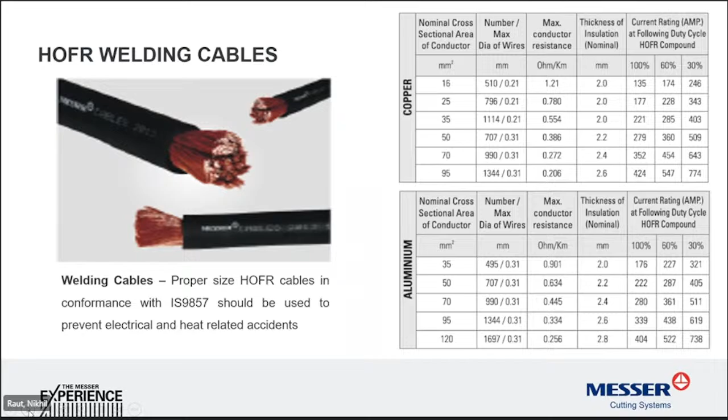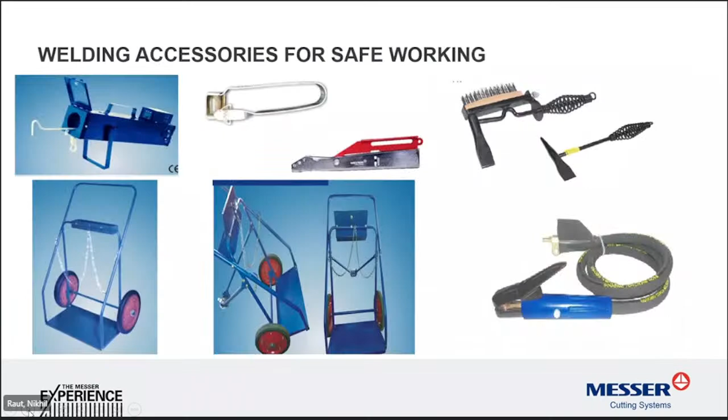Any other questions? Sir, I have a question, please say something about radiation hazard during welding. Can you explain what is the radiation level affected to a welder? And...

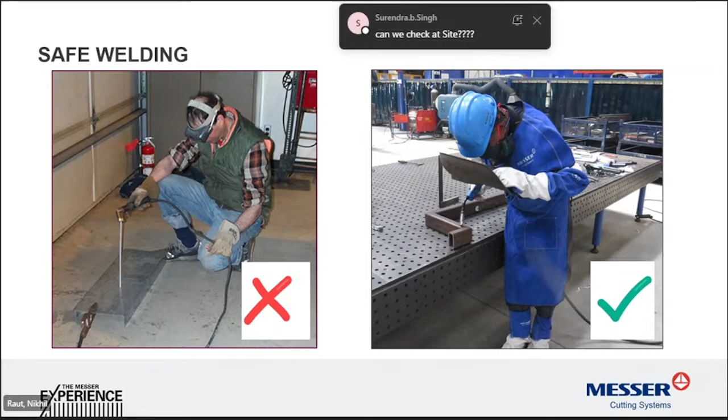So as per the usage, we just have to check it. Yes, it is recommended by the OEM that whenever you are using a flashback arrestor, once in 6 months at least you should check the device for functionality and get it cleared and tested so that your flame arrestor working can be certified. Here in India, we recommend at least once a year you send it for testing and checkup. If you do that, we can certify the device and give you a functionality certificate with the serial number of the flashback arrestor. That is recommended, but it is not mandated by law.

Surendra Singh ji, we can do this checking at site if you have more than 100 sets of flashback arrestors. These are chargeable basis. So if you have more than 100 sets, we can do the testing at site, otherwise you will have to send it to our place. Okay, roger, copy. Thank you.

Thank you. Hello sir. Shukla, yes sir. Does this type of flame arrestor depend on the material or not?

I didn't get your question clearly. Please repeat. I am asking, is it dependent on the workpiece flame arrestor?

Yeah, the functionality or usage of the device is totally dependent on the site. Sometimes you may not encounter any flashback at all, but the gas may have a lot of impurities which might go and choke the flame arrestor and the NRV. In that case also, you might be required to change the device over a small period of time without any flashback happening.

Okay. Thank you, sir. Anybody else? Any other questions you have got?

Hello, good afternoon. Yes, sir, good afternoon. Can you hear my voice? Yeah, you're audible, sir.